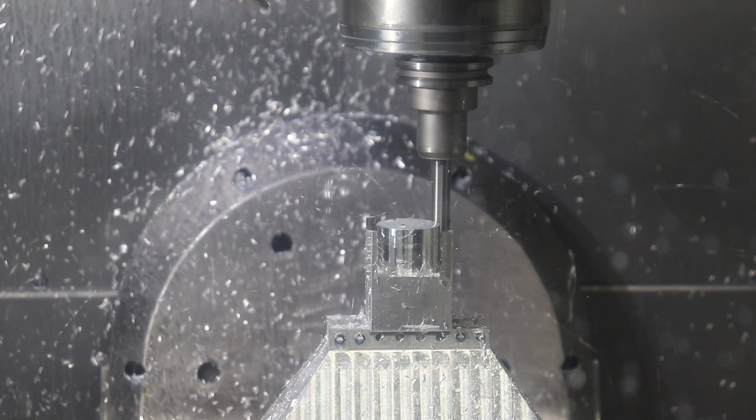So this week we're going to follow up on our robot end effector cube structure, and in this episode we're going to build the cylindrical standoff that is needed so that this cube is far enough away from the fifth axis of a robot where it doesn't actually roll up and gouge its corner. I can show you a picture of the orange robot next door.

Anyway, so this should be a pretty simple process. And I think this time we're going to cover a little bit more of the CAM process using Mastercam. I have Mastercam 2024 loaded, but I'm actually going to upgrade to Mastercam 2026 here pretty soon. So let's get into the process of importing the model of our cylinder, and we will machine this part on the Haas 5-axis UMC 750 milling machine. All right, so without further ado, let's dive into it.

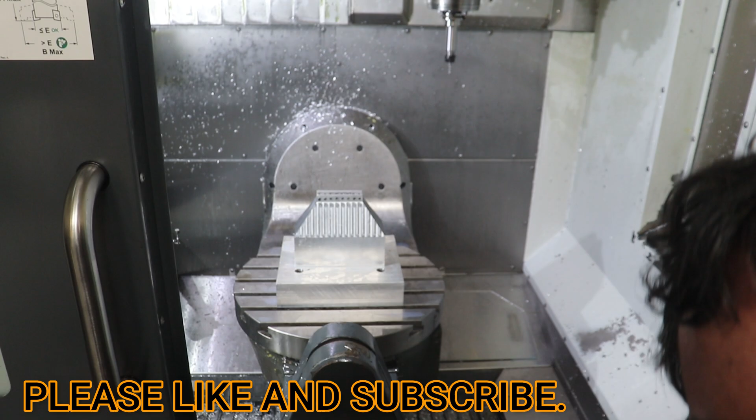Okay, so we've got a blank interface here with Mastercam, and on the 5-axis Haas mill, I actually have a pre-existing fixture that holds stock, and this is a basic one that I machined in a previous episode, which is kind of just this trapezoid. And on the top is a bunch of quarter inch, 20 threads per inch set screws in a 1/2 inch wide groove, which I basically put T-slotted blank stock in. And that model actually exists. It was modeled in Mastercam.

So in almost all cases where I'm doing 5-axis machining, I'll actually import the model of the mill table, the round table itself, plus the work holding fixture, and then I will merge in, as Mastercam calls it, the part that we're actually going to machine in this session.

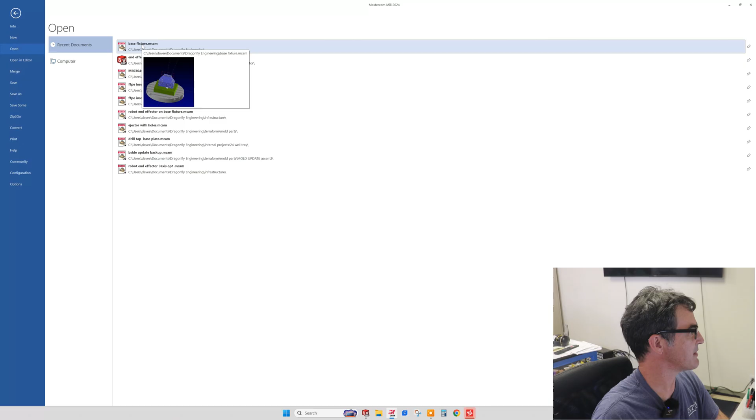So I've got the screen recording, and what I will do is I will say File and Open, and we've got base fixture. So I will open the base fixture, and then here is the pre-existing fixture. So this is our mill table with the T-slots in it. And then we've got basically the riser block, and then up here is a red outline for the stock that was defined in the last operation, or the last part that was machined.

So what I'm going to do is save this, File and Save As, and we'll go to the robot end effectors, and instead of calling it base fixture, we will call it extension tube. Let me bring the keyboard over here. Okay, so that way we don't overwrite our original model of our work holding fixture. Okay, and then I will make sure it says extension tube.

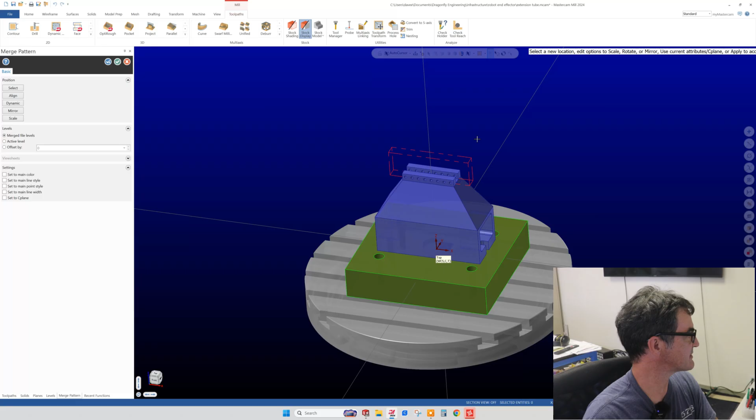So now what we want to do is what's called merge. We're going to bring in the model of our extension tube for our robot end effector, and it's a STEP file. So end effector extension STEP is what we're going to open. Now, since we're in the merge function here, we're not actually going to open a new file, but we're actually going to import this STEP model into our work interface. Okay, and then somewhere in here it should exist. I think I see it, like inside.

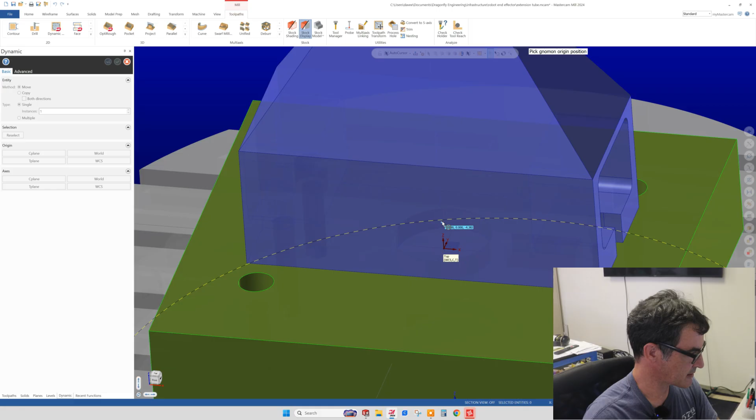So now what we want to do is place our model. So we can say dynamic, and then we can drag with this little gnomon thing our model out of the center of our fixture. Let's see if I can grab onto that guy right there. Hopefully it actually grabbed our part, and then we will zoom out with the mouse, and then bring our part up out of our work fixture, and I'll stick it right there.

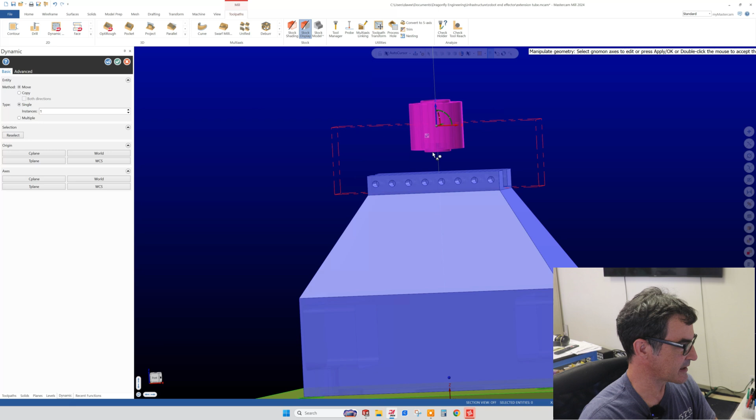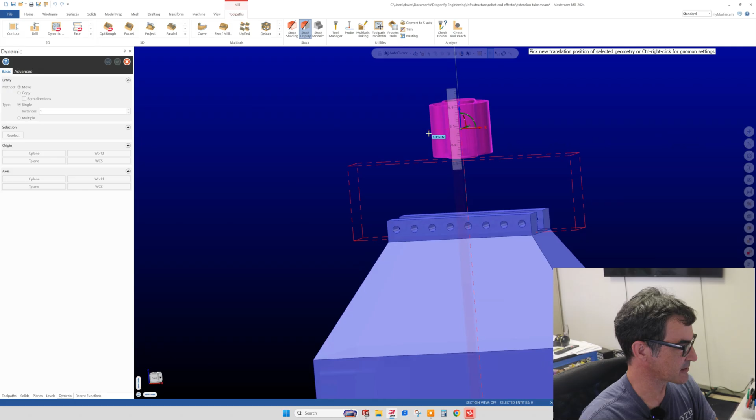And basically we want the part to be tall enough off of our work fixture so that we can get a tool underneath it to machine it off from our teed-in stock, which is not quite accurate right at the moment, but we're going to have a 1/2 inch tab that goes into these set screw clamping positions. So to move this part some more, I'll click on this axis, the Z axis, and then I can drag the part while I'm dynamically zooming in and out. And we'll get a decent height.

So that's probably good. Now if I wanted to rotate the part, then I can click on other features of this gnomon. This yellow dot is like dragging the whole center around. But I'm going to grab onto this arc section, and then we can roll our part around this way if we want. But we have a symmetric part, so we don't really need to mess with that because it doesn't really matter. So I'll hit escape, and then I'll hit the check over here.

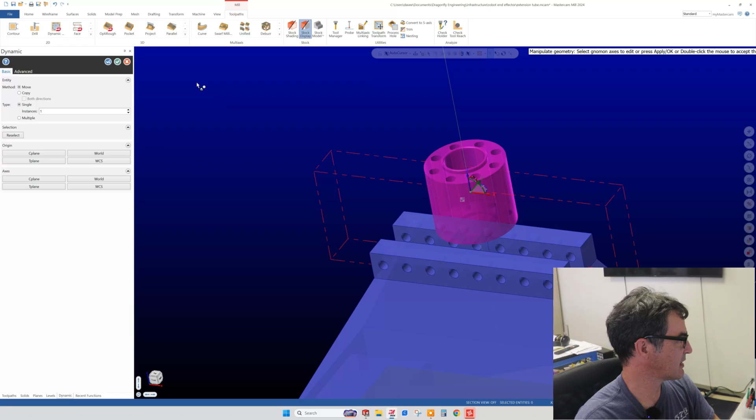If I wanted to make more moves or move other parts around, I could hit the check plus and then it'll accept this change or this move, and then I can do other motions as well. But I think we're happy, so I'll just hit check. And now our stock, or our part, is located on our fixture.

So I'm happy with that. Now we can go over here to stock setup. And I believe in 2026, this whole interface for the stock setup is changed. So yeah, we got to keep with the times, I guess. All right, so anyway, it's showing the dimensions of our stock that's going to be loaded into our fixture.

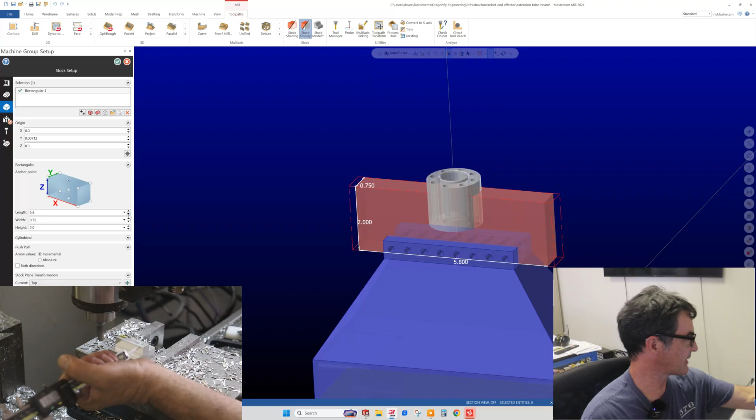In this case, I'm going to change its location up and down. I guess I didn't need to do that, but actually what I want to do is change the size of the stock. So I guess origin, and then the actual size is the second settings. But I'm just going to click up and down on the entry point there to reduce our stock, mostly just so I get an idea of how big my base stock needs to be, that I'm going to rough machine on the manual mill and then load into our 5-axis fixture.

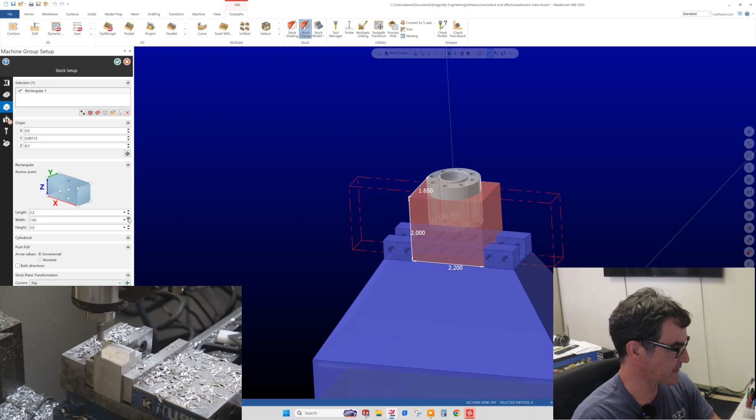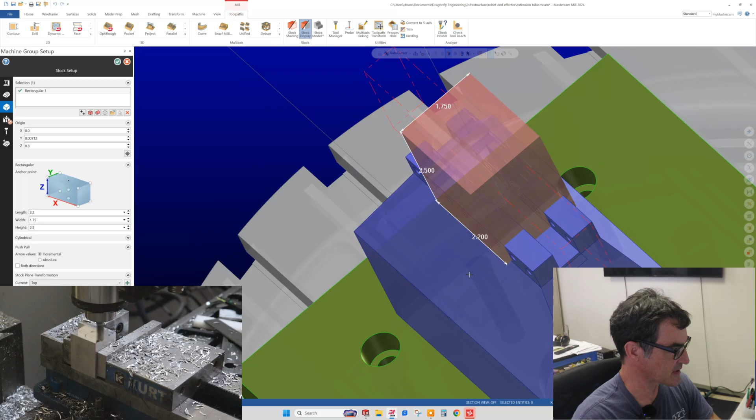All right. Keep in mind that we're going to have, oh, okay, I do need to raise the stock up. A T-slot on the bottom of this thing. Okay, so I'm raising up our stock, and that pretty much covers it. And I'm actually going to hack out this part here, but we don't need to show that for this setup. This is just to get an idea of the rough stock that we need. And then, okay, so I'm happy with the stock size, and then our outline for the stock is updated.

Now I do want to move our part. I need to check to see what kind of stock I have out there, and I'm just going to use scrap chunks of aluminum and just basically machine the T-slot in the bottom, and then just hog out a bunch of block scrap that's pretty much in the scrap bin at this point, because this is a small part.

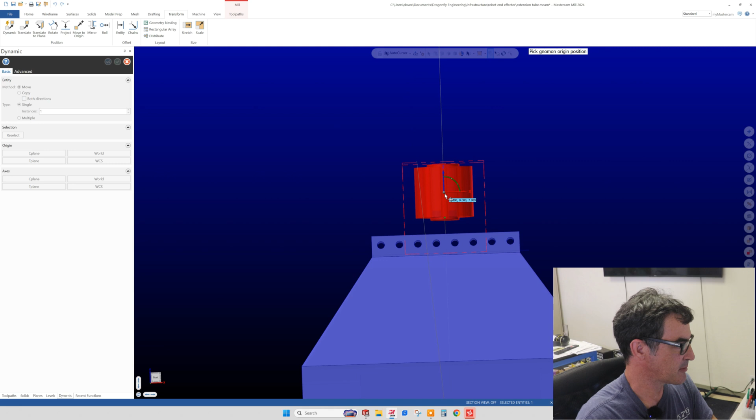Okay, so it's possible that I will drag this part up and down more, and to do that you go to transforms and then dynamic, and then our little gnomon comes back, and you can click on any feature like the center of this circle, but there's also a center of gravity, which is this little blue and white dot, and we can drag this guy up and down or left to right or whatever we want.

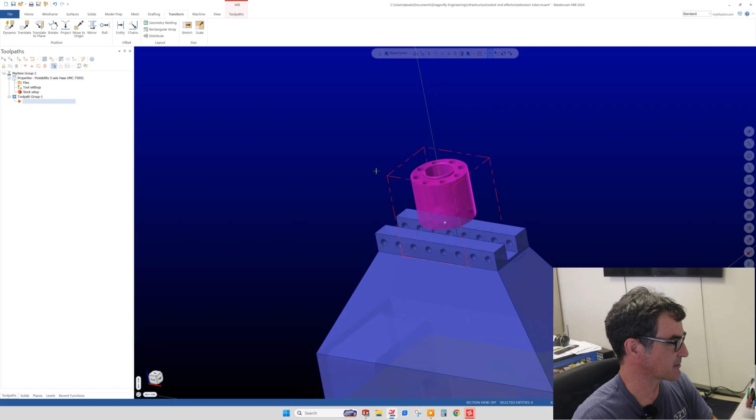We're going to machine one of these at a time, which sometimes is better in a 5-axis for more tool access. Whoops. All right, let's just go with that. And then we hit the check again. We're happy with that location. To clear the colors highlighted like purple, you can right-click your mouse and then click this guy, and then you can see our colors. And I will make this opaque. It's a little tricky because the record bar is right there too. Oh, here we go. Okay.

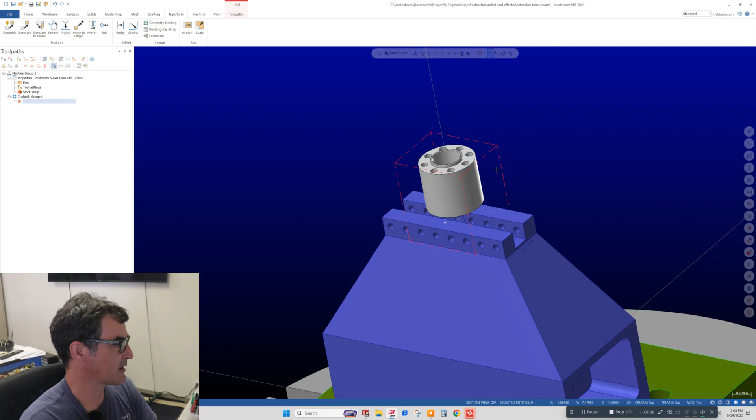All right, so that's bringing our part into Mastercam with an existing work holding fixture. So the next step is that we want to machine our part. So to the left is the toolpath group 1, and I'm going to right click and click mill toolpath, and I guess our first operation will be a contour. So this selection interface pops up, and there's different options. We can select a face or an edge, a partial edge, or a full edge.

So I'm going to say we're going to select a full edge, and I'm going to come over with our mouse, and the white and black dotted line highlights, and we're going to click that as our profile that we're going to machine. Our planes, we can check in the machining interface by looking at planes. And you can see that currently our work coordinate system, our tool plane, and our construction plane are all top.

And top can be denoted by this cube down here, which tells you where top is in the machining operations. So in the 5-axis, if you want to rotate your part 90 degrees, then you would start changing tool plane from top to front or back or right or left. And then basically your tool plane as well as your construction plane, you would update from top to, let's say, front, for instance. I guess we're going to do that at some point in this part, but this part is mostly cylindrical, so most of our machining is going to be where all the planes in the system are going to be set to top.

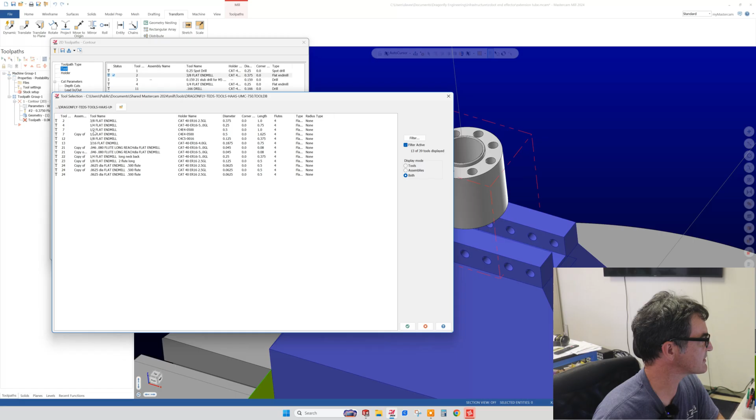This tool library has been preloaded, but you can also search for a tool library with this mouse button down here. And in fact, I do not see tool number 7. So I'm going to load a tool library. Oh, actually, I think I've got a filter on right now. All right, well, I'm going to select tool number 7. I don't see it up here. All right, I will double click tool 7. Okay, there it showed up in our active tool list.

Okay, so tool number 7 is loaded in the mill, and it's a 1/2 inch flat end mill. And then the feeds and speeds are also defined here. So I'm going to slow this down to 50 so we don't shoot the part off of our fixture, because it is just going to be tabbed down there, and we are going to do kind of a heavy cut. And 8,000 RPM should be good. So that's 50 inches per minute and 8,000 RPM.

And then cut parameters. I'm going to turn the wear compensation off or to computer. And depth per cut, these are settings to kind of limit the amount of cut that the tool path generator will take, so that you don't overload and cut too deep. So we're going to say 0.15 for our roughing, and then our finish cut will be 0.01. In this case, though, we're not going to really have a finish, so we'll just say 0, because we're just going to profile past the bottom of the cylinder a little bit.

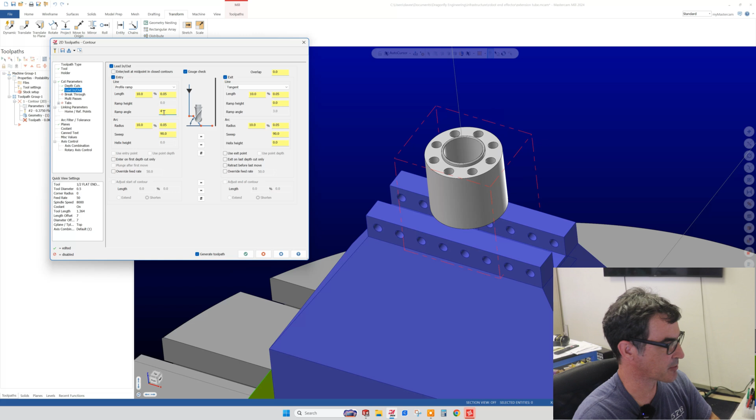Lead in and lead out, basically you can define how the tool enters your cut. In our case, we're going to do something interesting, which is going to be a profile ramp. And we're going to ramp at, let's say, 4 degrees. And this is kind of cool because the profile will just continue to go around your part and cut up to however the depth per profile. It's a helix profile that you're cutting. And you define that cut here.

Breakthrough doesn't apply here. Multi-pass. We're going to do a rough cut and then a finish cut. So our finish cut is going to be 10 thousandths of an inch. So we're going to do 1 rough and 1 finish. And I believe both of those will be with the profile cut. You'll see what I mean with a profile ramp here in a second.

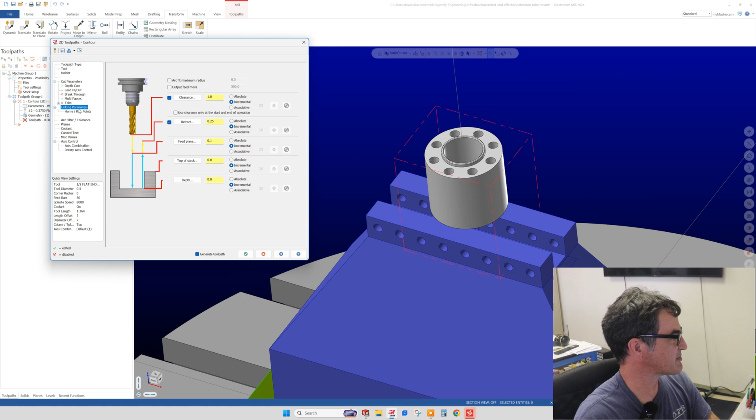Linking parameters basically sets how deep of a cut you're going to cut, and your clearance planes and feed planes and everything. So depth is currently set to 0. But you can also click and define it. So by clicking, we just told the mill to machine this profile down 1.377 inches. But we want to go slightly past it, so we'll go minus 1.39 inches. And we need to make sure our end mill flute length is tall enough for that. But it's actually defined within the tool parameters as well.

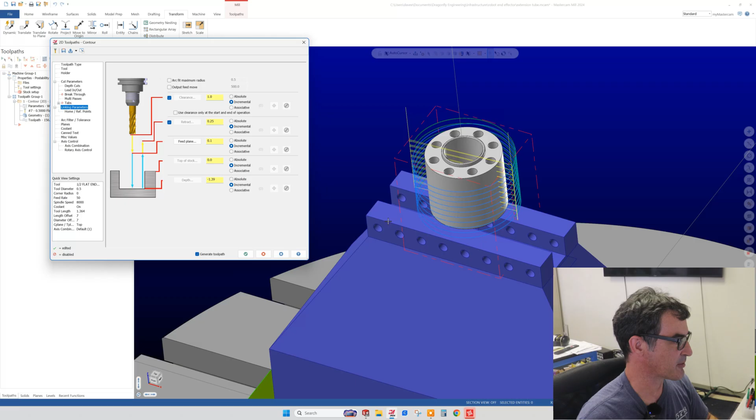Okay, and then if we hit this blue check, we will see what our machining operation will look like. And it looks like the profile ramp only happens on the rough. So let's figure this out. Let's see here, multi-pass. Apply to all finish passes. Oh, okay, let's get rid of apply to all finish passes, and then we'll see what we get. Finish passes all depths, final depth only. And then we'll click okay.

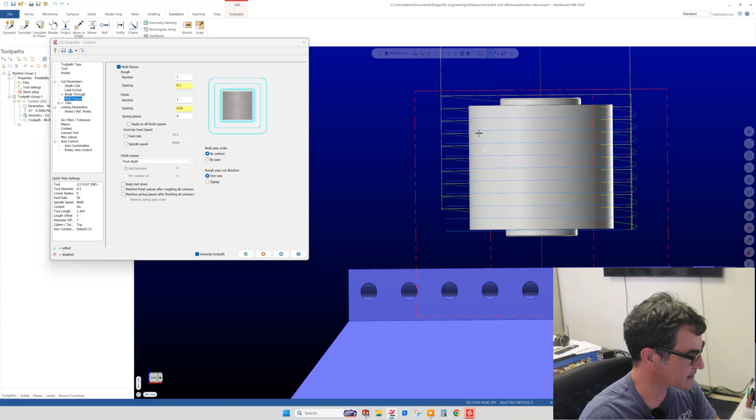So basically what's going to happen with this profile ramp is we're going to machine the face of this cylinder by spiraling down. So actually our machining operation, our hogging of the material, is all happening in just the tool entry. It's just that the tool entry is profiling our cylinder. And so you can see here, let's see here. Let's turn off the finish and see what we get.

Oh, something's not right here. Oh, I know what I need to do. Multi-pass, okay, back at depth per cut. In this trick, we're going to make the depth per cut the entire single cut itself. So we'll say 1.4. And then we'll hit the plus again.

All right, here we've got a spiral profile, which is going to basically cut the entire face and then do a finished circle at the bottom. But our angle is a little too high, so I'm going to go back to cut parameters, or lead in and lead out. And our ramp currently is 4 degrees. Let's make that 2 degrees. And we'll hit plus again.

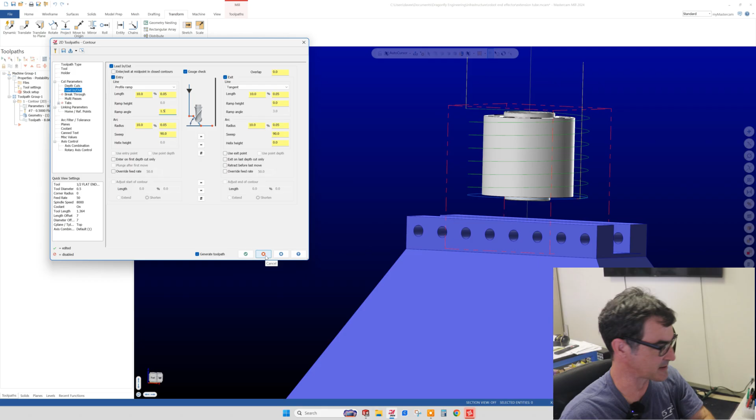And now we're getting more of a reasonable step over rate, because we don't want to spiral in too hard because we'll just gouge the tool and it'll be too much of a load. So maybe we'll do 1.5 degrees. And that's pretty much just like we're cutting a slope, we're hogging down into metal, except that that's wrapping around our cylinder. Okay, I'll hit plus again. Okay, so here we go.

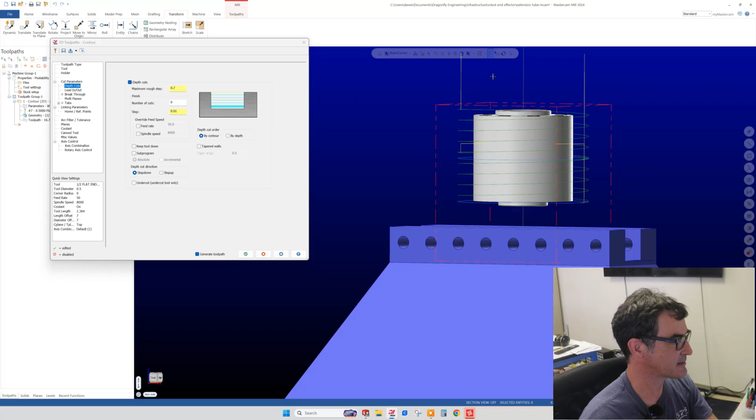Now back in the previous cut that I had, let's just divide this by 2, 0.7, or approximately divide by 2, and plus. Now you see how we would spiral down and then we'd do this blue actual profile cut, and then we'd come out or go back over to the next cut and then spiral down for our second blue cut. But you see this yellow line, which is actually plowing through our part?

That would have been a tool crash, because under linking parameters, our retract height is not high enough. So we would have just retracted 1/4 of an inch from our cut and then plowed through our part to get to the next entry of the next cut. So we want to make retract height like 1.25 inches. And we'll make our clearance plane, just to be safe, 1.25 as well. And we'll hit the blue check again.

And now you see that the rapid motion for the tool moving to the next cut location will raise up out of the stock and then over and then come down and then start its next cut. So you always need to check that you don't have rapid motions to your next cut cutting through your stock itself, because that would definitely bust your end mill off.

But in our case, we're going to do the interesting technique of, let's see, depth per cut is going to be the entire depth. And our lead-in spiral is going to actually do all of the machining. That way we don't have any gouge marks from an end mill entering into the cut. After it did its first circle, it comes out and comes over and then leads in again. But every time you lead into a cut, you have the risk, because of tool flexure, of having a little line where the tool entered.

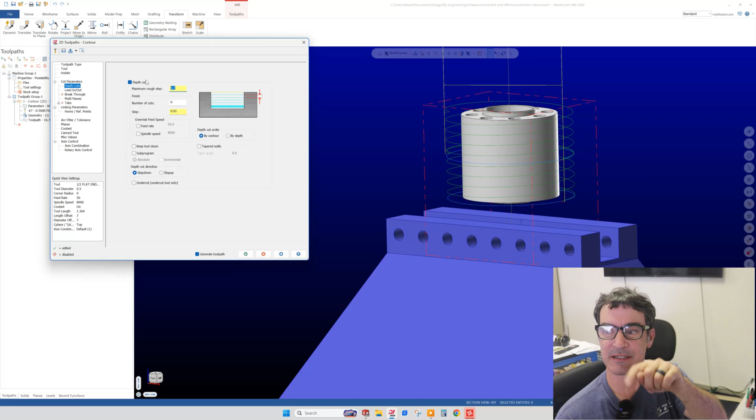By doing a continual spiral profile and then just doing the finished cut at the bottom, you don't have any tool entry marks or asymmetric forces on your end mill. It's seeing exactly the same force every time. So it's a good trick to do. So we'll switch back to 1.4 for the depth of cut, and now you can see we're going to enter our cut, spiral continually down, do a final cut, and then we're going to exit with that little red line right there.

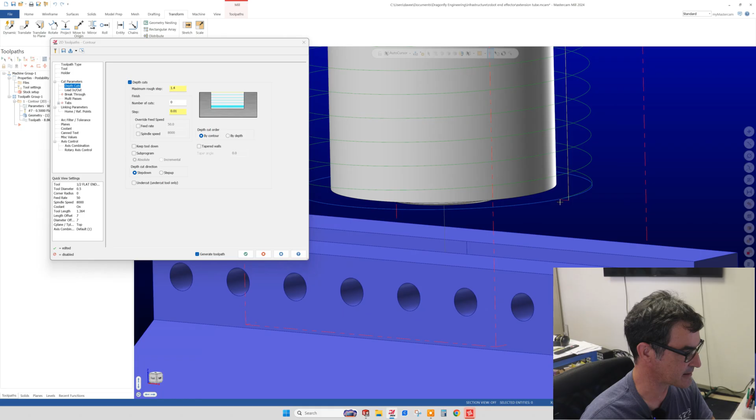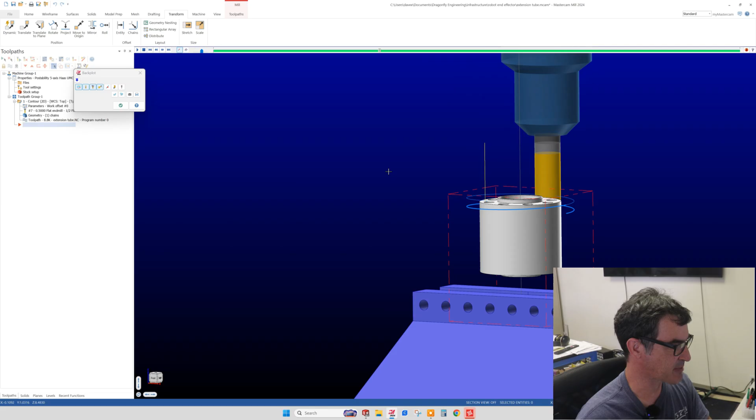So that looks good, and then we can simulate this back plot. Okay, here we go. There's simulation as well where you can load stock, and we'll get to that in a minute. All right, so I'm just dragging the play button, and you can see it's a little difficult. Well, actually, let's see if we can just play it. This isn't like a true animation per se, but let's see what happens. Okay, so it's going to show the continual spiral as we're basically leading into our cut, even though it's actually doing the full face cutting of our cylinder as we speak.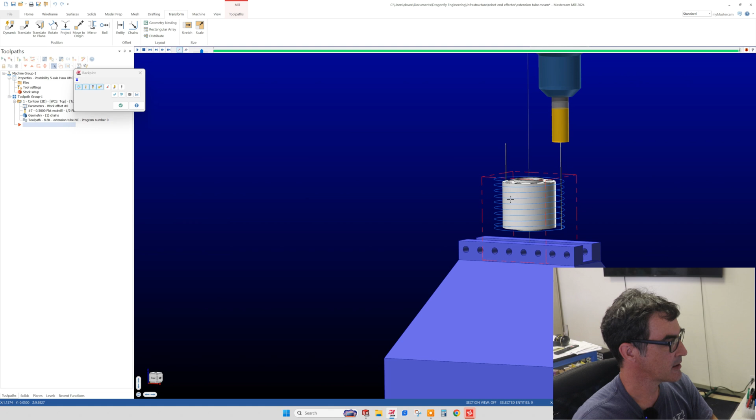And I'll have to look at the definition of this end mill because the way it's shown here in Mastercam, it looks like it'll gouge. So what we need to do is check the actual tool, and if we need to update the model of our end mill in Mastercam, then we'll have to do that. Otherwise, our tool holder may gouge into our aluminum stock. But anyway, that is the spiral entry for our cut. And after that, we will do some more profiling.

So I think the next step, I don't think I'll show every operation here because this isn't like a rigorous Mastercam tutorial. But I think what we'll do next is drill these holes. We'll center drill them, which is basically just to set the drill bit entry point with just a little dimple. And then we'll actually drill these holes as well. So let's do that next. Actually, I'm going to save this now.

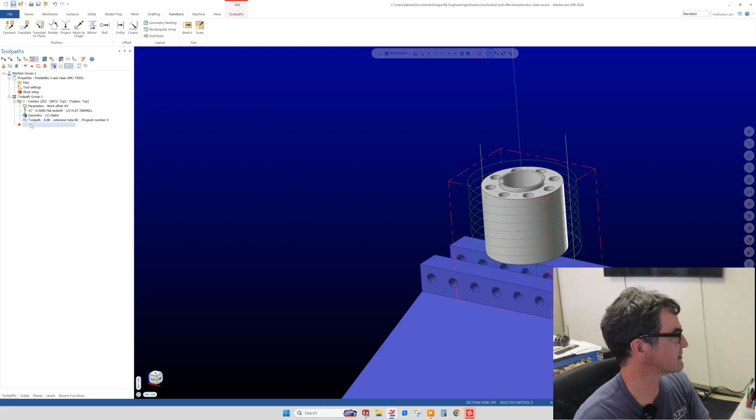And extension tube is the file name, so we don't overwrite our base model. And I'll say yes. Okay, and then over here in the machining tree, we will right-click again, and we're going to say drill. And then it's going to ask us, what do you want to drill? So we're going to select these holes.

There's all sorts of fancy ways to select holes, but to keep things kind of on an entry level, we will manually select these edges. If you select a face, then it's going to act differently. It's going to attempt to drill. Instead of your drill starting point being the top, it's going to say, okay, the full depth of this hole I want to drill. So if you're going to select edges, you need to make sure you select only edges or only faces, because otherwise you're going to have various drill depths.

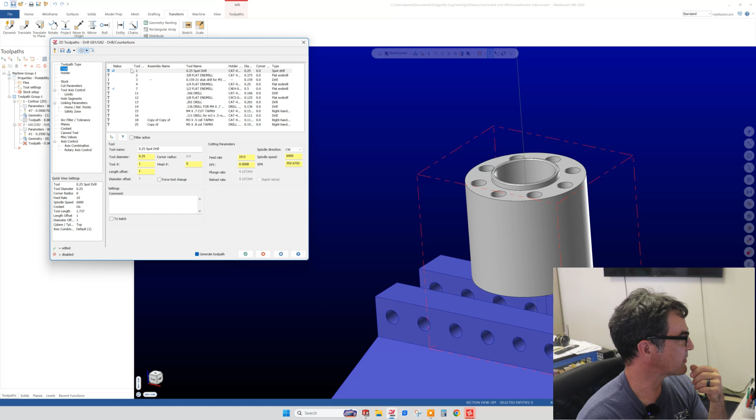If you select a face, Mastercam says, okay, you're going to drill the full depth of this hole. So actually, your definition of the hole starts down here, where if you drill edges, then the start of your drill is up here, and then you define a depth. So make sure that you have solid arcs selected for drilling. And then our process is similar as before, where I am going to select the spot drill, and it actually looks like it pre-selected it.

And then we go down the list of things, basically cut parameters. In this case, we're going to drill. Your options are peck drilling or tapping and all of that, but we're just going to do a basic drill. And again, this is the top axis. So down here in the bottom right, you can see our current cutting planes are still all top.

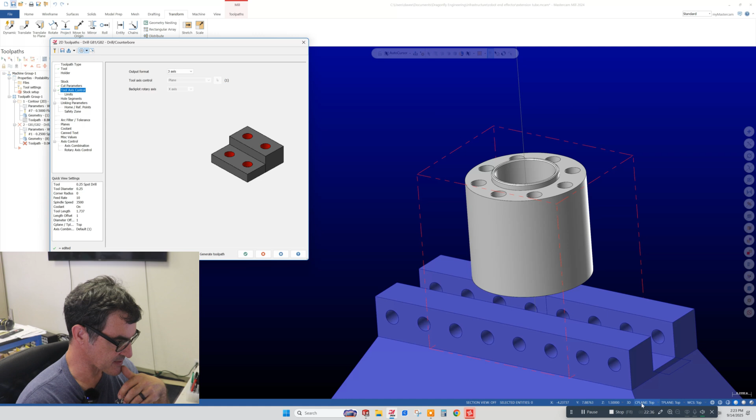Linking parameters will determine the depth of your hole, and we're going to go 1.6 inches deep. And we will hit the blue check, which is kind of a preview. Oh, I see, I should have said minus 1.6. So definitely use this blue check a lot. Okay, and now I like the drilling preview in Mastercam.

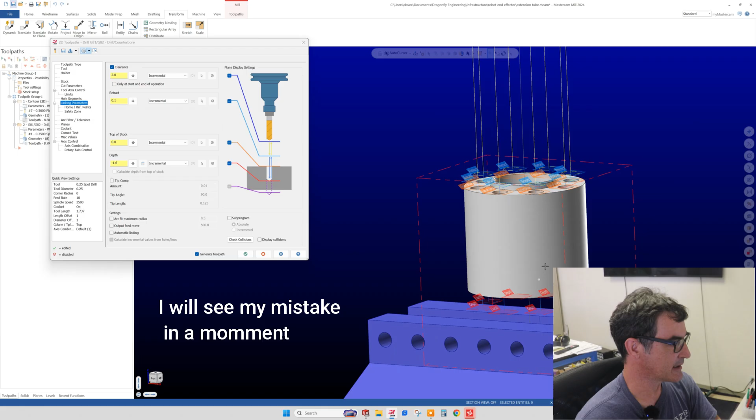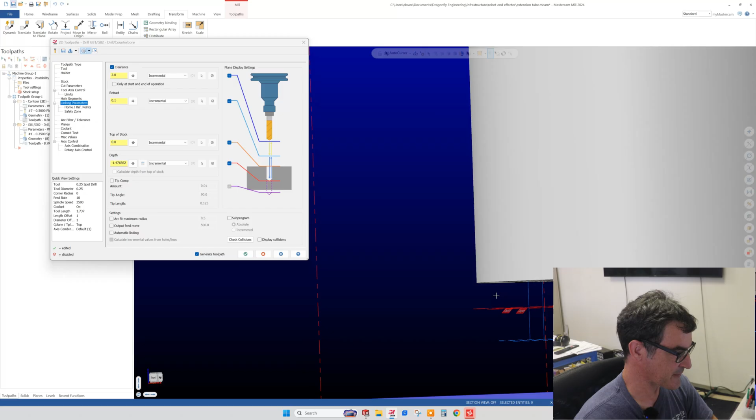Apparently some people don't like it, but it shows you the retract location of your drill bit, the top of stock of your drill bit, basically where it's going to start thinking it's drilling the hole, and then your depth of cut. And you can actually grab these flags and drag it up, and then they'll all follow in that group, which is kind of cool too. So you don't have to fuss about exactly how deep your drill bit is going to be and everything. And you can do the same with retract.

So we're getting a little close to this machined edge here, and we haven't hogged away the stock at the top of our cylinder yet. So I'm going to drag retract up a little more just to be safe. And then they all follow, which is kind of cool. But you do need to keep track of order of operations here so that you don't wind up trying to drill into a hole that's deep in the stock before you've actually machined away that stock.

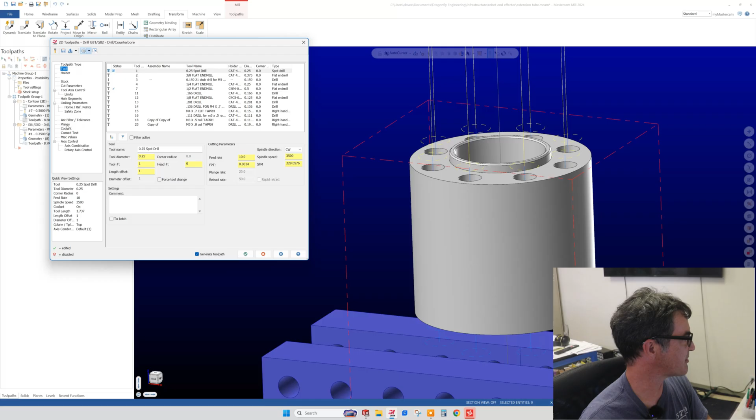So I'm going to go back and machine away this stock with the 1/2 inch end mill, but I don't want this video to turn into several hours. And then, oh, wait a minute. Actually, we're just spot drilling right now. So we don't want our depth to be that deep. So I'm going to go back to linking parameters, and we're just going to make this depth minus 0.05. Now I've got two minuses. And we'll hit the plus.

Okay, so now you'll see that we're just going to put a dimple in to guide our actual drill bit. So I'm going to say yes to that. And then we can also play this by saying backplot and play. Or actually, I'm going to drag this one so you can see the drill bit and how deep it's going to go. And you can change the transparency and everything. We can do that down here or here. Well, not that one. But here you can see how deep our drill bit is going to go.

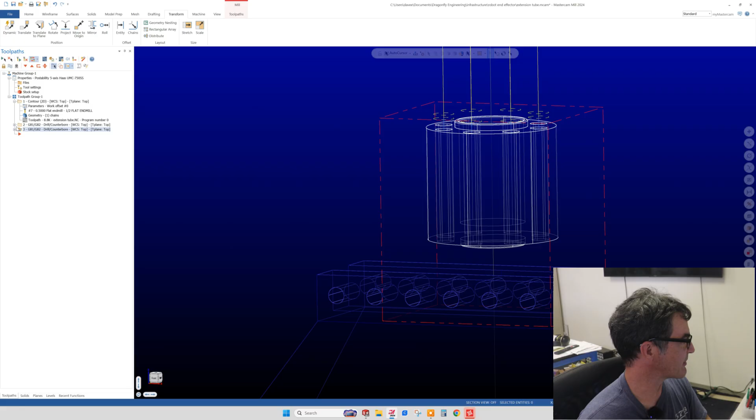Okay, so now we're actually going to drill the hole. So I'm going to right click and I'm just going to say copy this drilling operation, and we can paste it. And that way we don't have to re-click and select everything, but you can go in and edit the one that we just pasted.

And in the parameters we can change tools to, let's say a 201 thousandths drill, number 13, which is approximately 5 millimeters, which is the size of the hole that we are going to cut. This is a clearance hole for an M5 screw.

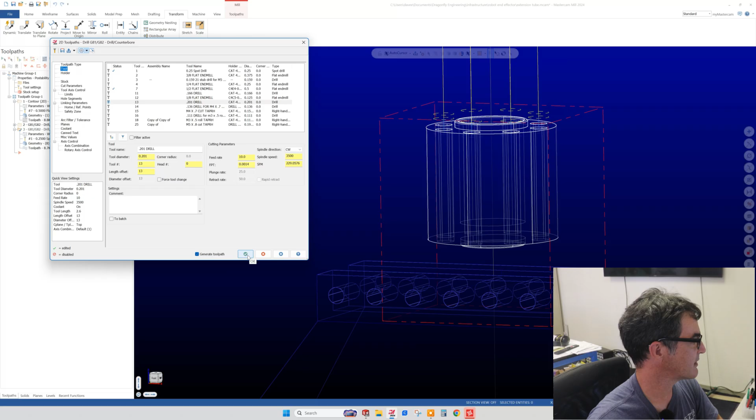Okay, and then we say yes, we're going to use that drill bit, and we can go to our linking parameters and then update our depth to be minus 1.5, and we'll hit plus. And there we go. Now we have our drilling operation.

But the drilling operation we copied is actually for a straight drill, not a pecking drill. So when you drill deep holes, you do need to do pecking, which is basically taking mouse bites of your hole so you can clear the chips out and so you don't jam up your flutes.

So to change the drilling operation within this copied global or larger drilling operation, we can go to cut parameters and the little menu of options, and then we are going to say peck drill, and we're going to drill 0.1 inches per peck, and then we'll hit plus.

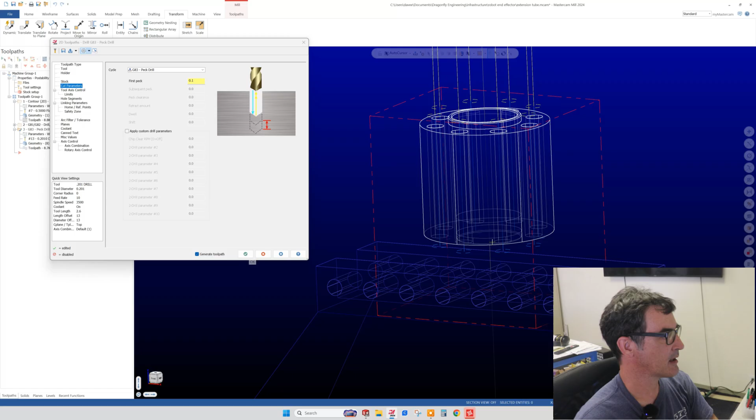And basically the preview is the same because we're drilling to the same depth, but now we're going to peck down every time. We can check that our tool clearance is kind of high right now. So under linking parameters, we have this 2-inch clearance, but we can make that 0.6 inches instead. We'll hit the blue check, and then that's a little more of a reasonable tool clearance. In fact, it's still kind of tall, but anyway.

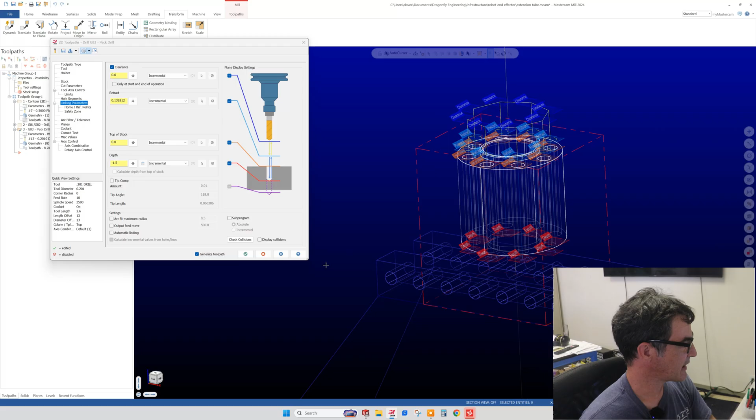And then we will hit plus and green check that we like everything. And then again, we can play this operation with backplot. That's what they call it. And then we'll hit the play button, and we'll watch how the drill is going to peck drill all of our holes. Anyway, we don't need to see every one. So that's drilling our holes out.

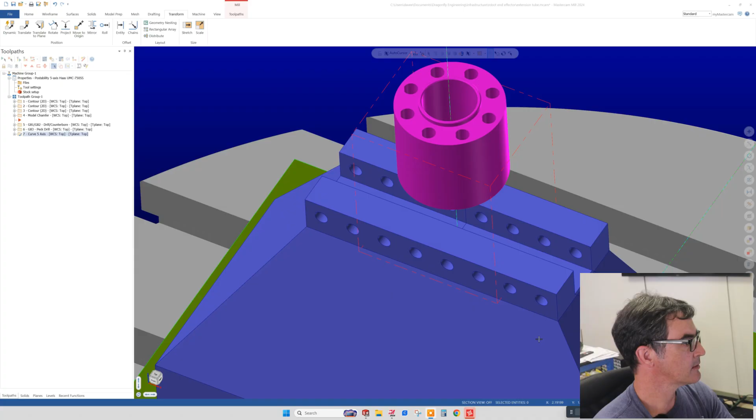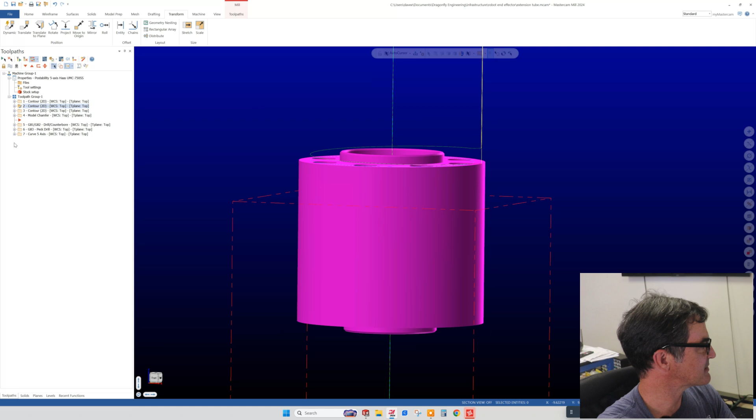Okay, so we are done with our drilling, and I did a couple more operations off camera just to save some time since we're at like 28 minutes or so, where I copied and pasted the profile that we did and just cut this top boss right here. I also did some model chamfer as well as chamfering this corner.

So the thing with model chamfer in Mastercam is the option model chamfer only chamfers sharp corners like this corner. But in this CAD design that was brought in, these corners were already chamfered in the model, and model chamfer doesn't do that. So I had to do a regular contour with the same chamfering tool.

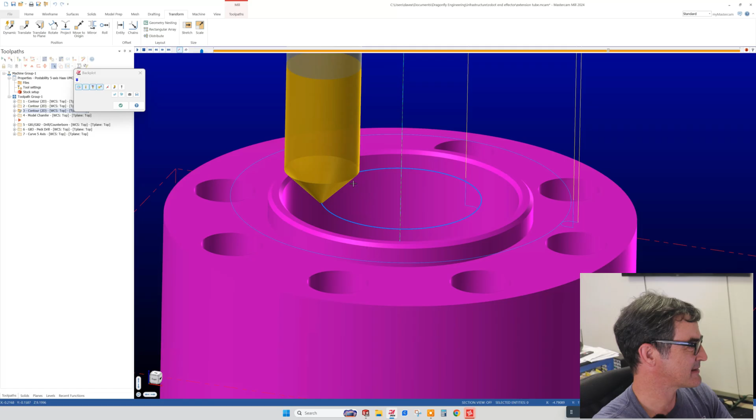And let's play that real quick. So yeah, this is contouring with the tool, comes in, profiles, and obviously we got some issue. So I got to figure out what's up with that. I think I have to update the tool and tell it that it's only 20 thousandths in diameter because it's assuming it's using the side face, so I'll have to fix that.

Anyway, chamfering's kind of a hassle with Mastercam if the model's already chamfered. So maybe that's something to fix. Need to do the pocket, but I wanted to move forward with some of the more interesting things. One of which is I moved our part up in the fixture because of this interesting new scheme.

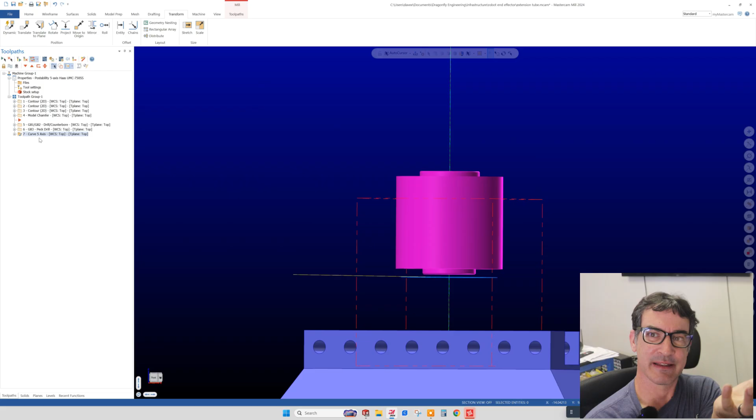This is going to be a true 5-axis milling operation, not a 3+2, which is most of these operations. And 3+2 is, you know, you do 3-axis machining, but you rotate the part and then machine everything on that side, and then rotate the other way and machine everything with just 3-axis machining.

With this contour 5-axis, which I basically did by clicking around and playing with it, you go to toolpath, and then in the multi-axis area, I selected curve and came up with this operation here. We can quickly go through it. Yeah, basically it'll follow a curve in space, which is kind of neat. So I did that, and I chose

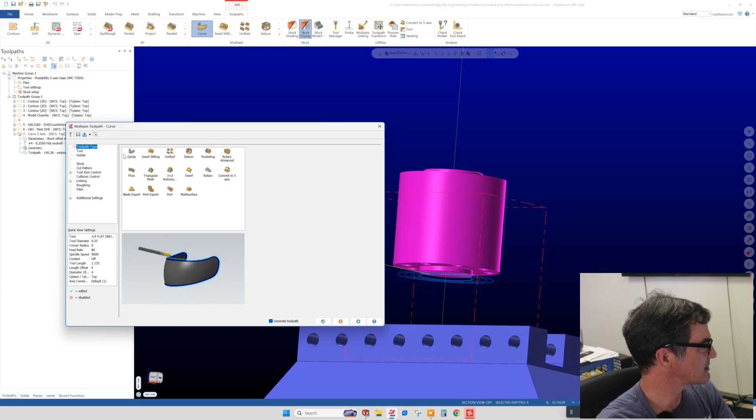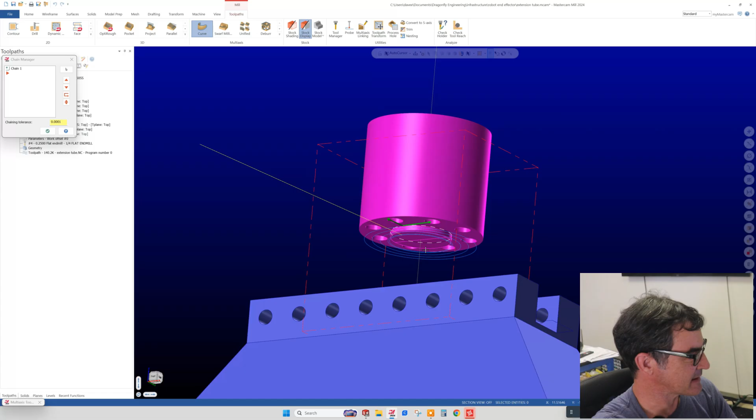this curve right here at the bottom, because this boss is basically nestled up underneath our stock, and it's between our work holding and our stock. So the only way to machine this boss is to come in from the side, or do a second op with the lathe, or another CNC operation where you flip the part over. But the whole idea with 5-axis machining is you have only one setup. So yeah, I basically just clicked around until I got it to work correctly.

And you'll just have to go through it yourself as well if you decide to get one of these. One of the things is I did multi-passes, 4 rough cuts, 0.1 inches deep per cut, and then a finish cut of 20 thousandths. So the result is this interesting toolpath.

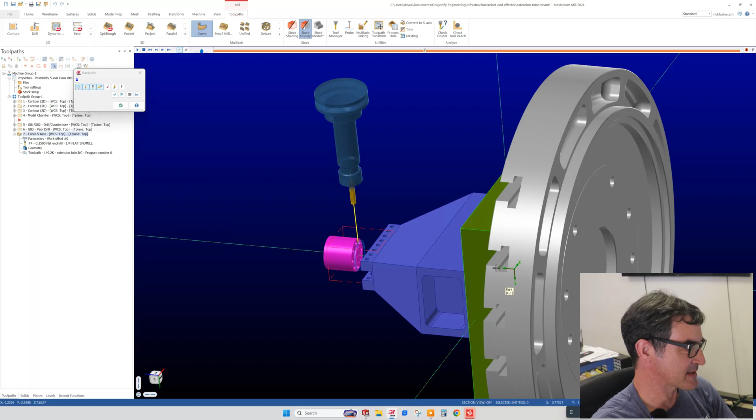And what's going to happen is the mill is going to rotate the part on its side like this. And then when we play this operation, by backplotting and hitting play, you're going to see that the end mill is actually going to spin around this way. And actually the end mill stays vertical because our work coordinate system remained top, but this table is going to spin as basically we machine our boss underneath here. So that should be cool to see.

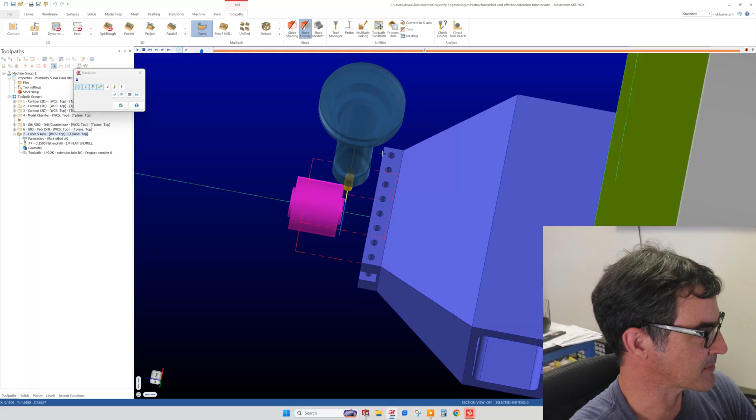But I did have to raise our stock up because otherwise our tool holder was going to crash with our work holding system. So let's play that again so you can see what I'm talking about. If our part was down at the original position like here, then basically the ER collet holder would have crashed into our work holding fixture right here. So we raised it up. Okay, so that'll be fun to see on the mill.

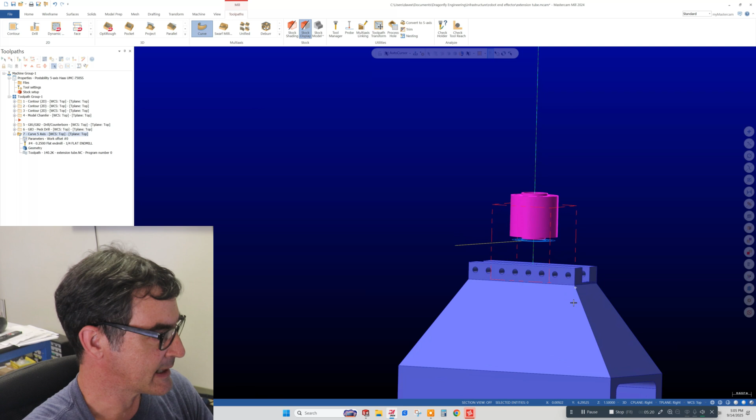So now one of the last operations, there's a few more things I need to do, like machine the pocket, but pocket milling is pretty similar to contour milling, so maybe I'll do that off camera. But we do need to tab off this part after we cut our underboss here. And to do that, I drew this line right here, and basically I did that by adjusting the planes.

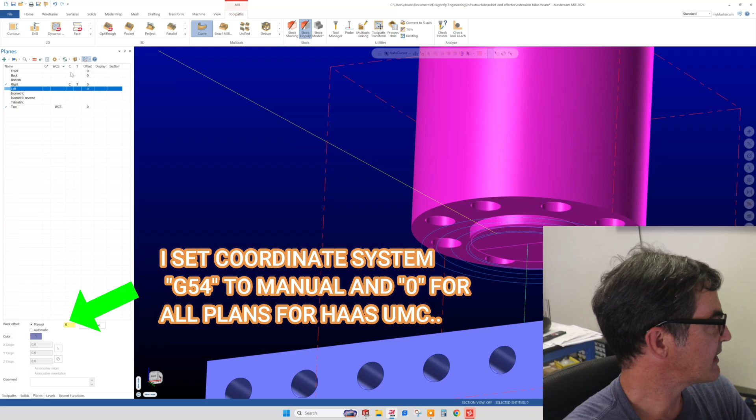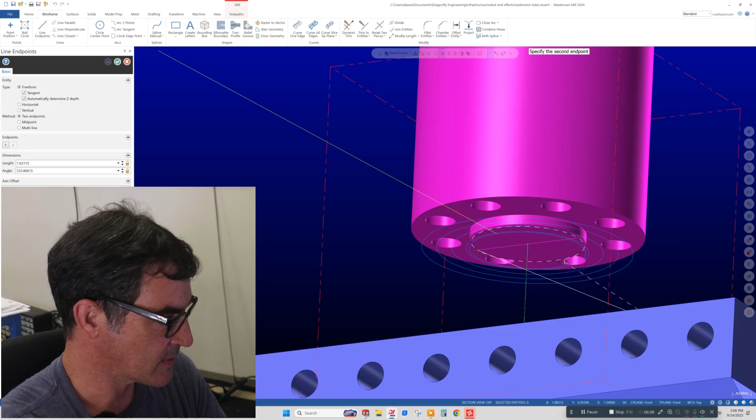You can go to the bottom left of your workspace, and construction and tool planes I set to the front, while work coordinate system is still set to top. You basically always leave that at top. And now what I can do is, under wireframe, I can draw a line basically from one edge, let's see, front, okay, here we go, to the other side, like so. And then I use that line as a feature, or we can do that now actually.

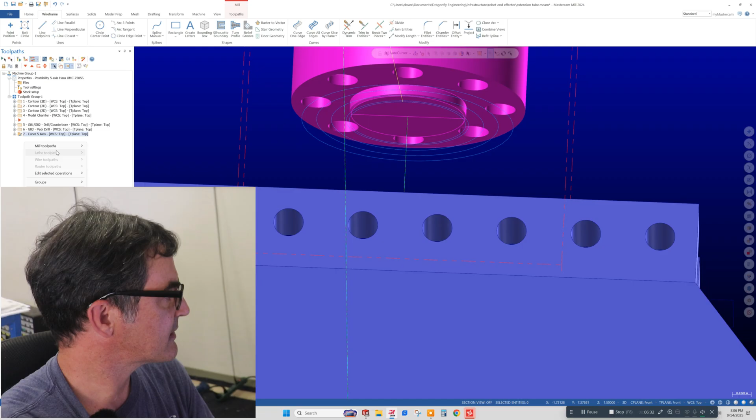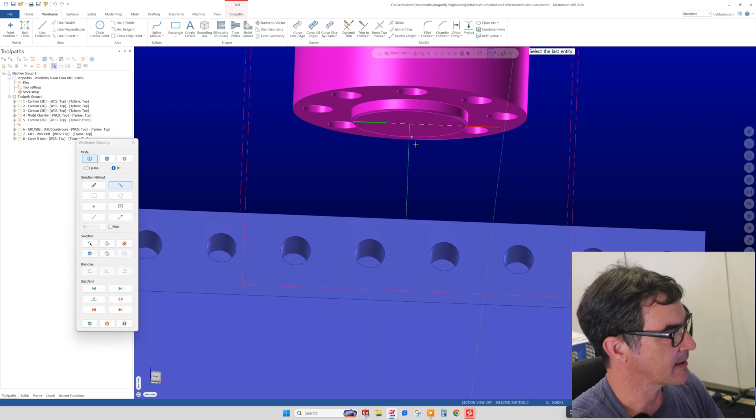So under toolpath, we will do a contour, and we are going to select a wireframe and a partial, and then I will select this line right here. So the green arrow means start here, and then the red basically means stop here, and that's the direction of cut that we're going to do. And our tool plane, or our viewpoint of the tool, is this direction right now. So that means we want to cut on the right side of our line. So okay, we're happy with that.

And then we'll go through basically the same list of questions. So we want to use tool number 4, the 1/4 inch, and depth of cut, we want to turn that on. Lead in and lead out. We can do tangent, but I'm going to add like 200% of the tool diameter for the lead in, and then the radius will be 0 because we want a straight line cut. And then you can hit this double arrow down here to move all of the settings over to the lead out as well.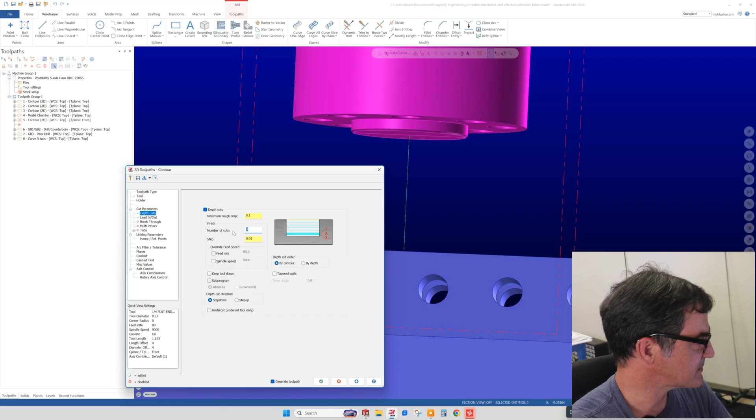Multi-pass, for demonstration purposes, we'll leave it off. Depth per cut is on. Let's see, for a finish, we'll do one finish, because what we're doing is we're machining both sides of the stock under our part and just leaving like a little leaf of metal, a tab is what it's called, that you can then break off with your hand when you're done.

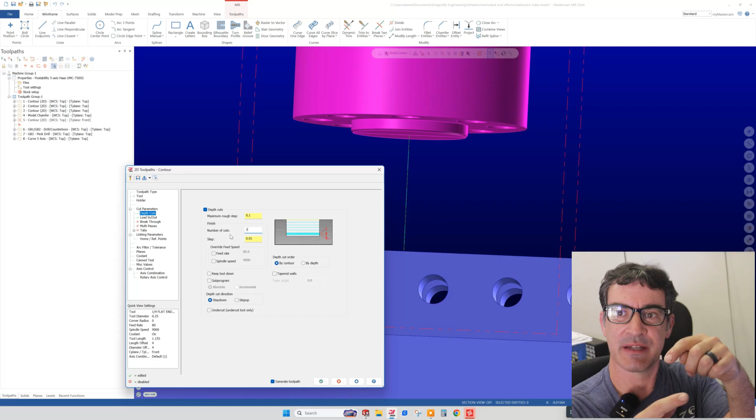And until you cut down to the final bit of metal, the part is still held by the chunk of metal that's left. But as you get down closer and closer to that leaf, you need to back off the aggressiveness of your cut, otherwise your part may just shoot off. So that's why we're going to have a finish cut of 10 thousandths here.

Okay. And then linking parameters. So basically all the other settings were just limits and settings for the actual meat and potatoes of your toolpath, which is all done in linking parameters. That's where you say, I want to cut 1 inch deep and I want the tool to clear by ½ an inch or something. So most of these are just settings, but linking parameters is where you actually make it happen.

Now since we want to leave a tab, and I drew that line at the 0 bisecting plane of the part, instead of making the depth a minus number, we're going to make it a positive number. So we'll make it 10 thousandths positive. And yeah, so that should do it. Feed plane, I guess now that'll just be 0.1 above the actual stock. And we'll hit the blue plus and see what we get.

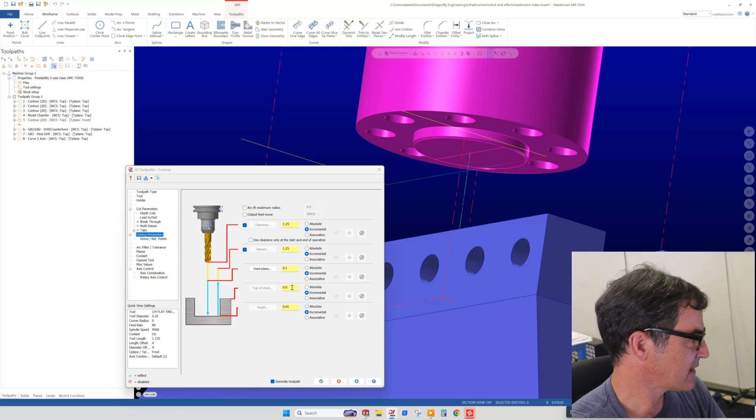And we just got 1 pass there. Oh, because the top of stock is set to 0. So basically Mastercam said, okay, well your stock is at the line, so I'm just going to do a single cut. So we have to tell it. I guess it's not quite smart enough to recognize this solid up here, but maybe if I was better at this, it would. But we're going to say that the top of stock is 0.8 inches.

And now if we hit the blue plus again, you'll see how it said, oh, okay, I'm going to follow the rules that you said, but now the top of stock is out here somewhere. So I'm going to go ahead and cut my first pass and then come out. And I think this looks good. So let's play this with the back plot and see what we get.

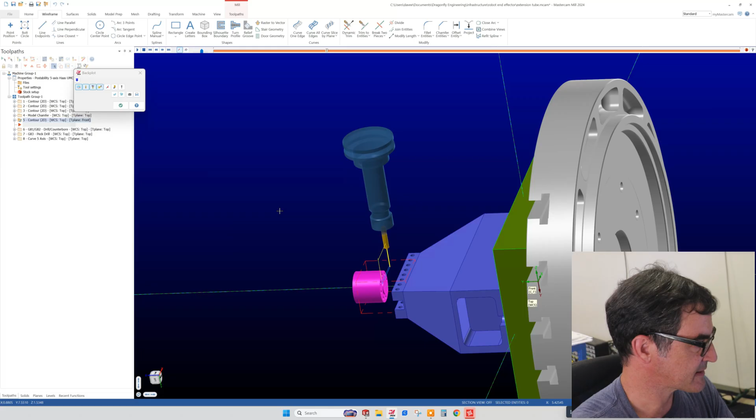Okay, so here's our tool coming in from the side. The orientation in the mill will be more like this because our spindle is always vertical. And then we'll hit play and see what happens. All right, so we come out, we make our next cut. We come out, make our next cut. And yeah.

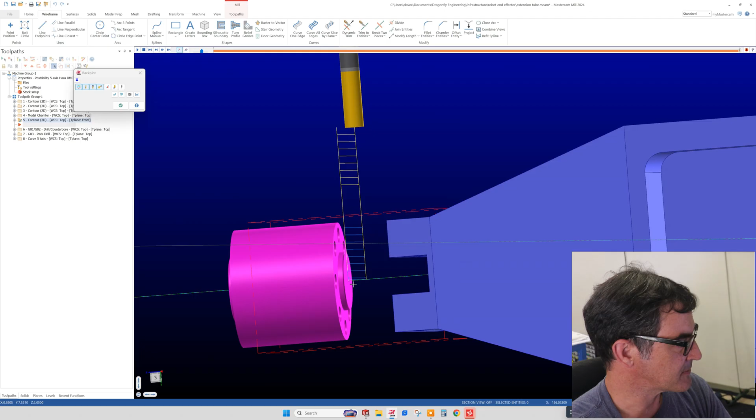Now again, if I needed to spend more time, or if I truly didn't have to do any finishing on this part, like polishing with a lathe or whatever, then I could do a finish cut as well, but it would just take twice as long to cut this thing off. Now we're only cutting to halfway down, minus our tab height. So this green dotted line is the actual center of our part, so we're leaving a little bit of metal.

So now what we can do to basically cut away the other side of our tab is to simply just copy and paste. Oh, you know what? I was putting this contour in the wrong location. So I'm going to move the red arrow down because we don't want to cut our part off before we're done machining it. So I will drag and drop the contour and say move after. Okay, so here is our finishing contour.

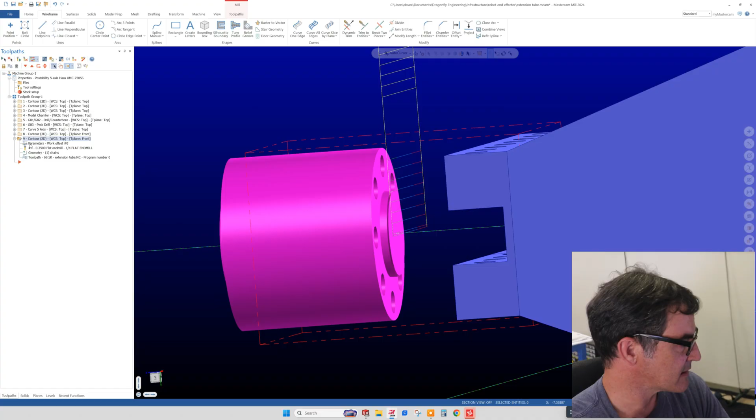And now what I'm going to do is move our little red placeholder to the very bottom of the stack. I'm going to copy the contour we just did, and I'm going to paste it. And now we can go in here and change these numbers, mostly just the construction and tool plane and the handedness of the contour cut to be the other side. Since we're moving to the other side of that same line on the back side, we need to switch from left to right. So let's do that first.

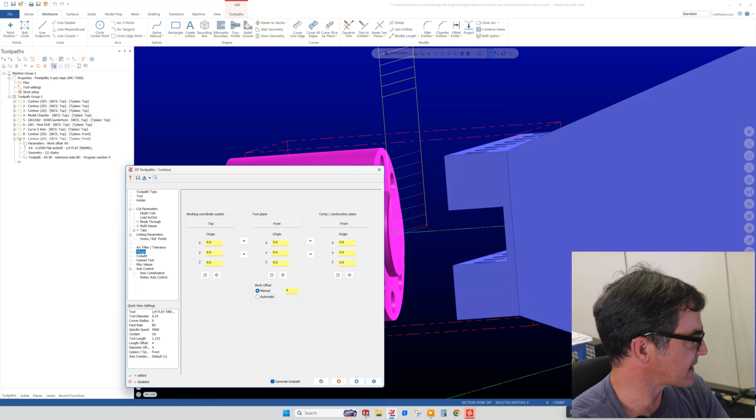So cut parameters, compensation direction is right, and we're going to switch to left. And then the planes we have to change too. We can change that here within the toolpath program itself. Right now we're on front plane, and if you look at our little box here, it says front is up. Since we're cutting the other side of our tab, we want to switch this to back plane. So I'm going to click back and then hit yes, okay, and then we can hit the double arrows to move that setting over to cutter compensation or construction plane as well.

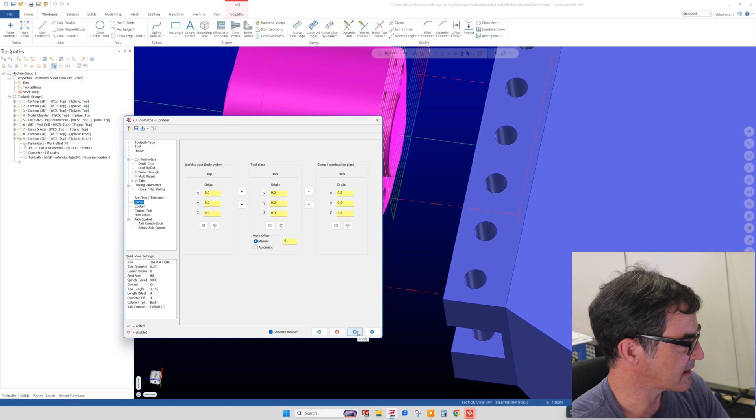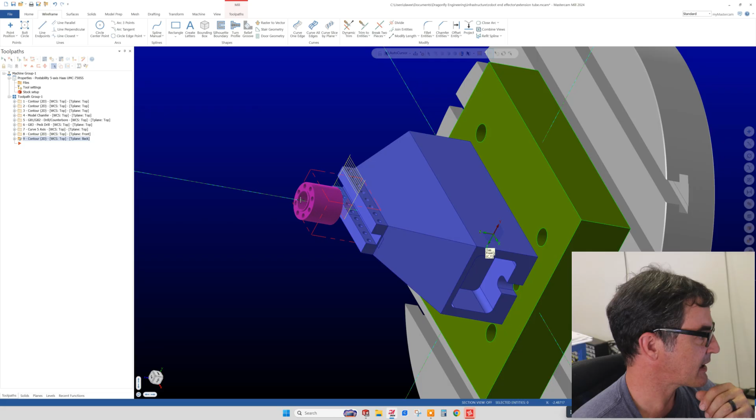And then we'll hit plus. And all of a sudden our second cut has the right handedness and it's on the back side. So the mill will rotate the part 180 degrees and then repeat our cut. And at the end we're just going to have our finished part hanging on with a little tab of metal right here. So I'm going to finish the pocket, and then we can go out and machine this thing.

Or I may have been showing segments of this within the Mastercam tutorial, but maybe at the end here I'll just do a super fast elapsed time machining operation of the whole thing. Not sure yet. Okay, let's do it.

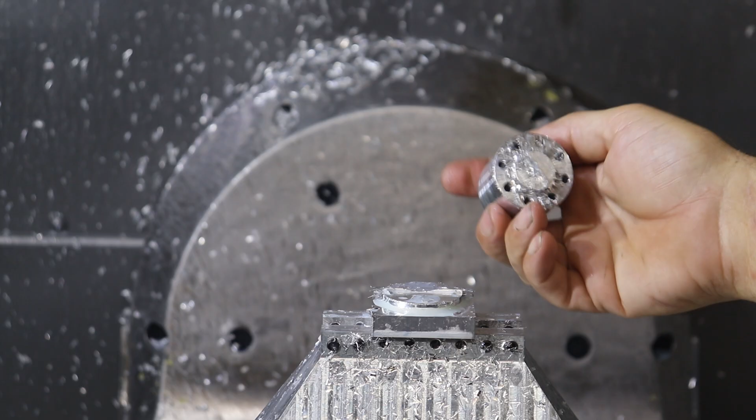All right, let's break this thing off. There we go. One finished part. Oof. Might have to do a finish. Slow down the radial cut on the bottom. And I'll need to clean off our break-off tab as well. But looking pretty good.